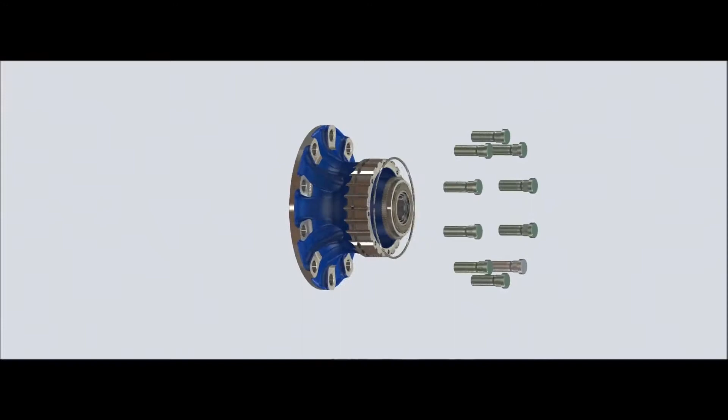We manufacture premium quality ductile iron axle end assemblies, wheel hubs, brake drums, brackets, and steering knuckles for trucks, trailers, and passenger cars. With more than 500 employees and 70% of sales exported globally, we are one of the largest auto parts exporters in Pakistan.

3 generations of the Rastgar family have contributed to the success of this enterprise, which has continued to grow on a basis of specialization, dedication, and customer service.

In 1967, Imtiaz Rastgar, a 21-year-old graduate, established a foundry manufacturing grinding media for the cement industry of Pakistan.

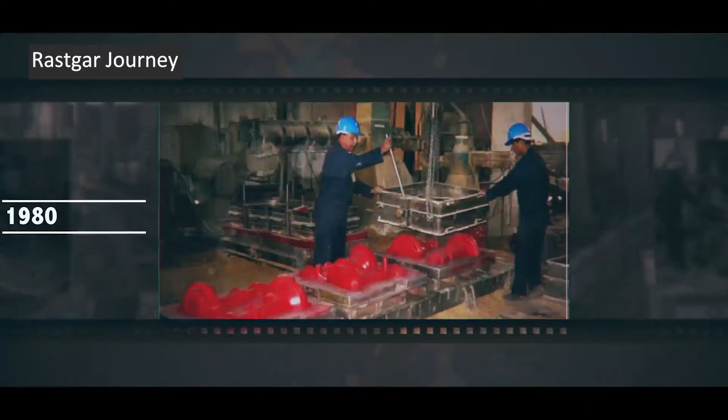In 1980, Rastgar made a new foundry for the automotive industry for making axle housing and other components for the Pakistan tractor industry. By 1990, Rastgar established the nation's first ever private sector CNC machining facility.

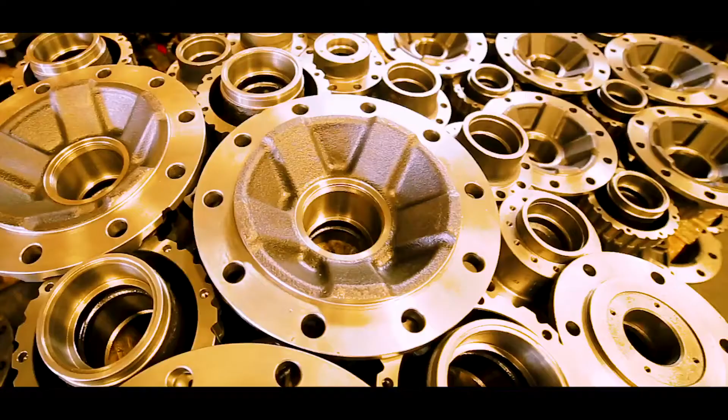In 1991, Rastgar produced its first machined wheel hub. Soon after, wheel hub became the highest selling product of Rastgar, and today we have produced more than 6 million wheel hubs for the OEMs and aftermarket.

In 1994, Rastgar pioneered auto part exports from Pakistan to Ireland and later to US and various countries in Europe. In 2005, the country's first ever high-pressure molding line was procured from Heinrich Wagner Sinto, Germany.

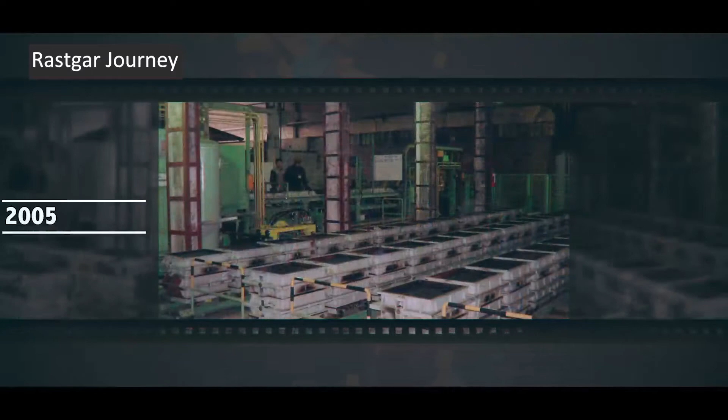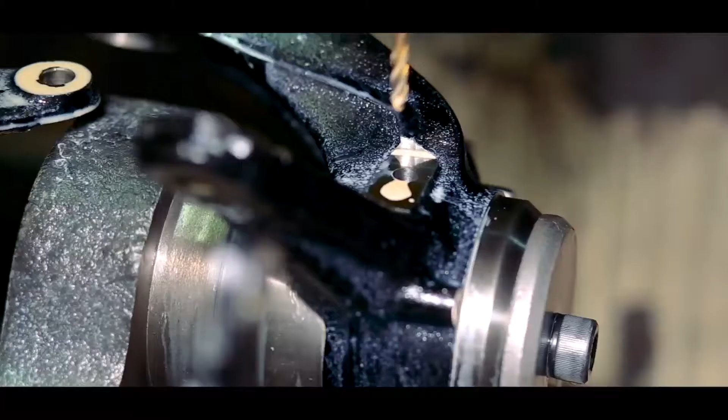In 2008, with collaboration of our technology partners from Switzerland, Germany, Holland, and Denmark, Rastgar successfully developed steering knuckle of Toyota, making it one of the few companies in the world capable of producing safety-critical components.

Later in 2016, Rastgar started production of steering knuckles for Honda. At present, we export to more than 50 countries worldwide, and Rastgar has developed into an iconic brand, synonymous with quality and timely delivery.

At Rastgar, all our operations are under one roof. This is what sets us apart from competitors.

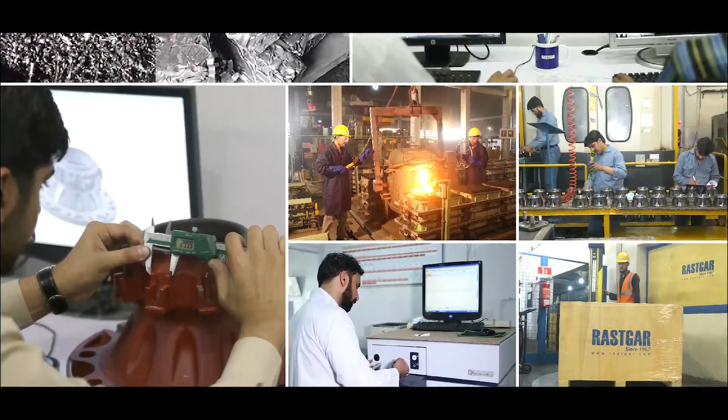From procurement of raw materials to product development, engineering, foundry, CNC machining, quality assurance, painting, till packaging, all are carried out in our own premises. Thus, we are able to maintain quality at each and every step.

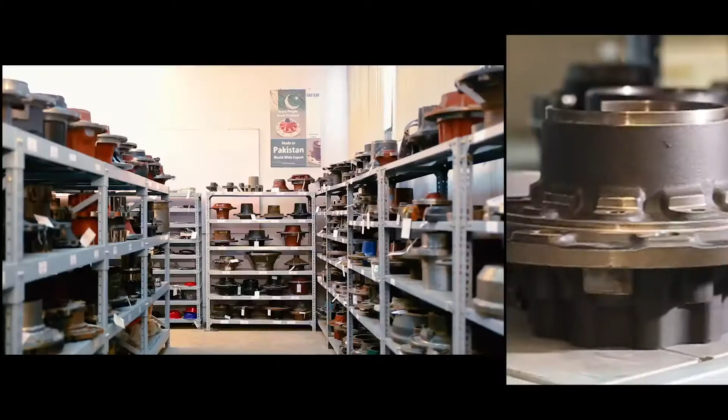Various renowned companies of the world are associated with Rastgar as technology partners. Our product development department is fully equipped to develop components according to customer specifications, as well as to engineer new components for customers according to application needs.

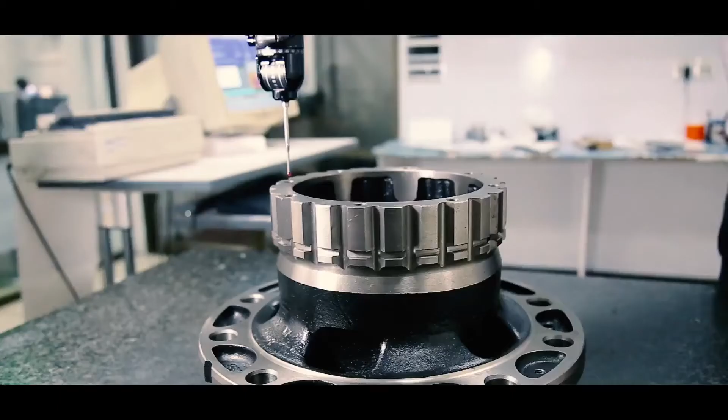Casting process simulation softwares like MagmaSoft and SolidCast are used before development of actual parts of all critical components. We offer rapid product development, and our off-tool samples can be developed within 21 days. All patterns are produced in-house.

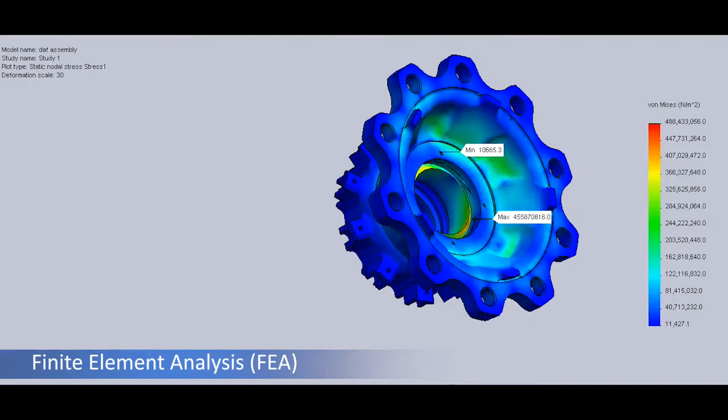In addition to CAD, CAM, and 3D modeling, finite element analysis, FEA, is conducted for testing the structural and physical strength of the components. In-depth knowledge of metallurgy and systematic statistical process control are at the heart of precision manufacturing culture at Rastgar.

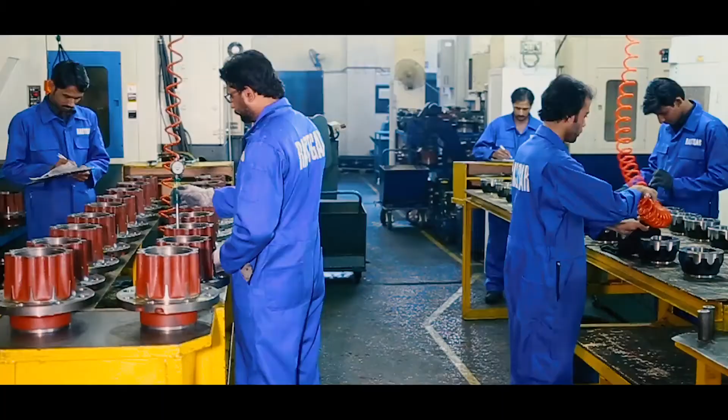Spread over 100,000 square feet, we have an annual capacity to produce 12,000 tons of premium quality gray and ductile iron castings.

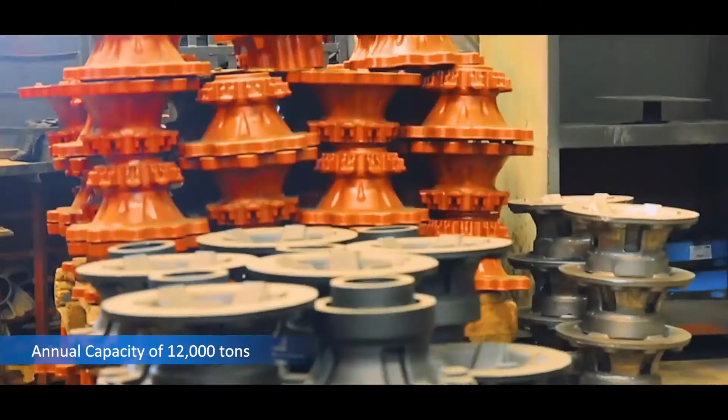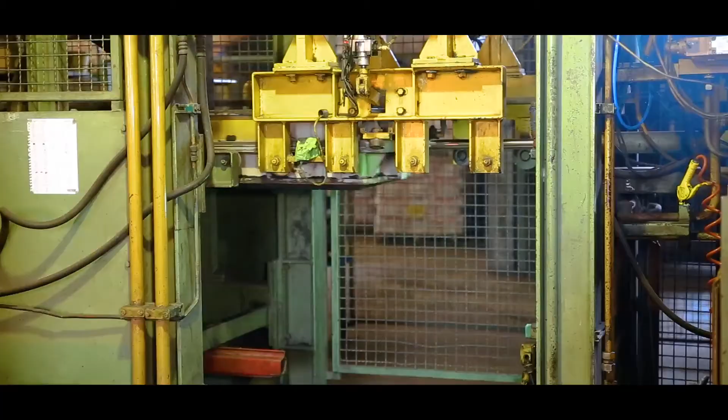Molds are made in high-pressure, fully automated molding lines. Sand preparation and conveying system are supplied by Eirich, Germany. Both molding and sand systems are centrally controlled by Siemens Process Control System.

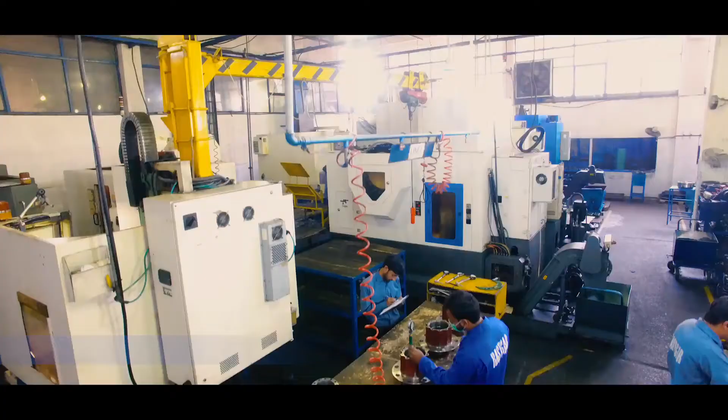Molten metal is supplied by 2 inductotherm furnaces with chemistry controlled by spectrometer, CE meter, and chill test. Special purpose machining cells have been acquired for high-volume production. Special fixtures and advanced machining techniques are employed to ensure the highest level of accuracy, productivity, and repeatability.

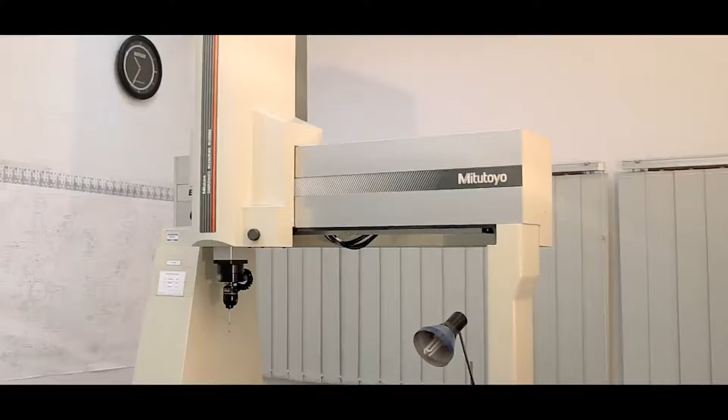Rastgar is an ISO TS 16949, ISO 9001, ISO 14001, and OHSAS 18001 certified company. Our QA department is equipped with coordinate measuring machines, surface roughness testers, ultrasonic testers, cryogenic testers, metallurgical microscopes, image analyzing softwares, and complete sand testing lab.

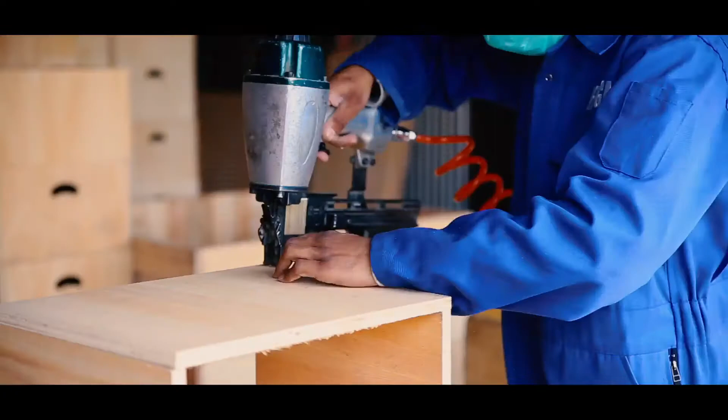We offer packaging and preservation of our products as per customer specifications. We always provide quality products, on time, every time.

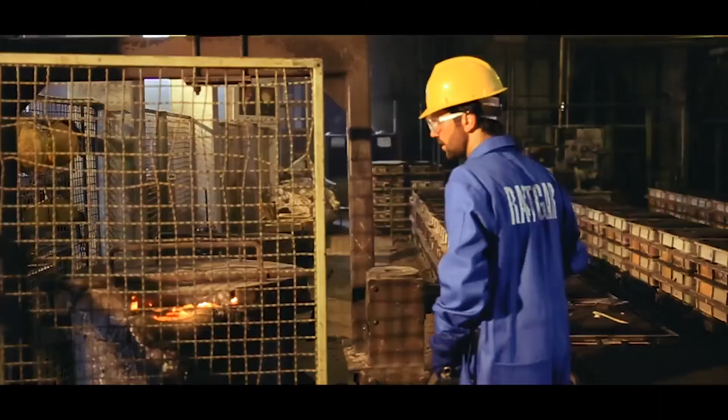Our technical staff has extensive experience in various foundry and machine shop specializations. We are associated with various international experts who visit us regularly for technical training and technology transfer.

We have a culture of continuous learning, and frequent skill enhancement sessions are conducted.

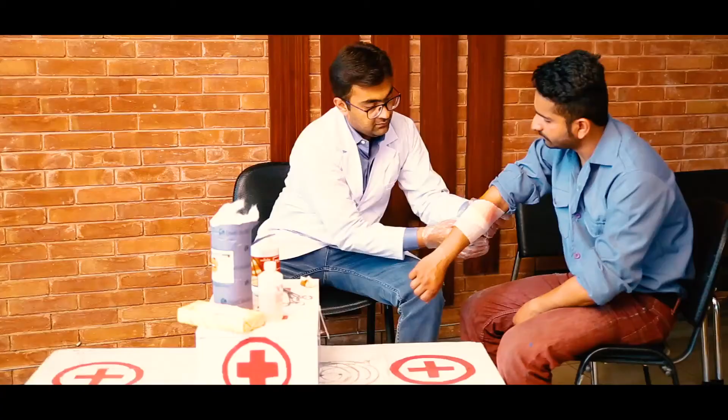At Rastgar, safety is a priority. As we value precious lives of our team members, we have a special focus on safety orientation and emergency response training. We frequently participate in various international exhibitions to have a face-to-face interaction with our customers.

Our customers acknowledge us for our premium quality, and we have received multiple quality awards in the past decades.

At Rastgar, we conduct business the right way. Our culture encourages professionalism and high ethical standards. We provide good working environment and training opportunities.

We continually facilitate academia-industry linkages and play our part in knowledge transfer and skill enhancement of university students through seminars and factory visits. We are driven to design an environment that inspires and empowers team members to reach the fullest potential of their creative and professional talents.

Apart from various financial and medical benefits, Rastgar engages its team members in creative pursuits, sports and fitness programs, and community service projects.

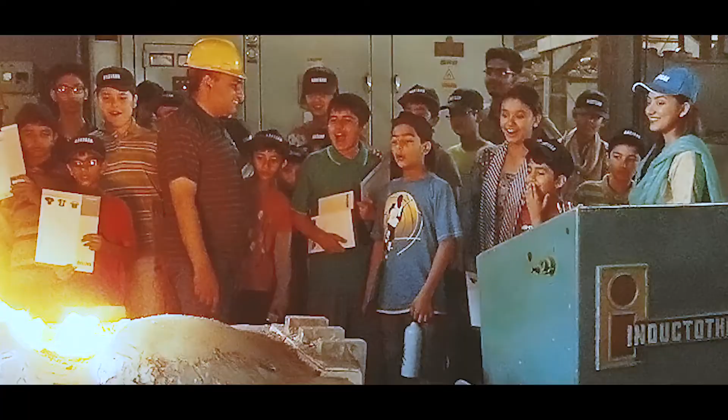We remain committed to a greener tomorrow. In line with our vision, Rastgar's ideal is the beautification of its environment, be it through elimination of waste, recycling projects, or system optimization. Over the course of 50 years, from a small foundry to a recognized auto parts manufacturer,

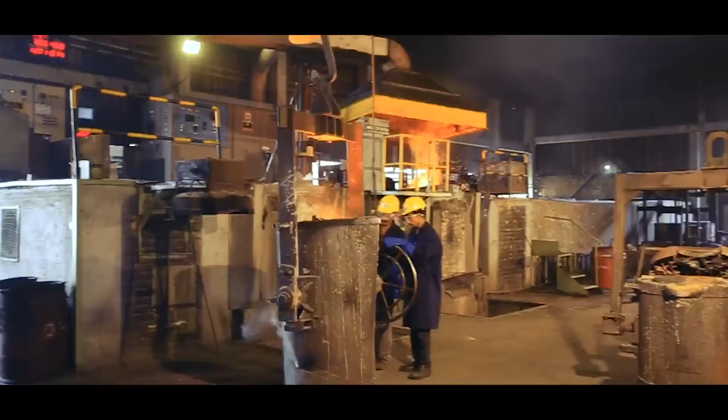Rastgar has gone a long way. While we are proud of our past, we are enthusiastic about our future, and we strive to make the world a more beautiful place through our products, our processes, and our people.